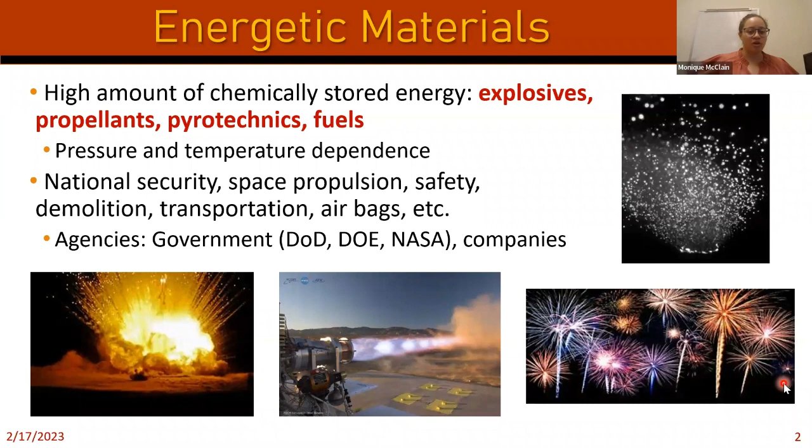Again, they're used in many aspects of our society, anywhere from the government to commercial vehicles to all kinds of things. So even though energetics is a very broad category, I'm going to be focusing mostly on composite solid propellants today, and then towards the end of the presentation give a little teaser about plastic bond explosives. But in general, energetic materials tend to have common features.

I'll be focusing mostly on composite solid propellants here. So to break down what's going on, composite propellants are essentially mixtures of polymer with a high particle content. You can think typically it tends to be above 70 volume percent or above 85 weight percent, depending on the types of particles used, but very high content in general.

Typically the particles will be an oxidizer. Some of them will look like large particles like this, so you'll have some coarse particles and some fine particles in between to help improve our packing ratio. The oxidizer tends to be ammonium perchlorate in the propellant, so that makes the majority of the particles, and they tend to look like crystals - essentially they look a lot like sugar. Then we can include some other particulate additives. For example, we could include aluminum particles to help it burn faster, or we could include iron oxide as a catalyst, and there are plenty of other additives you could include in your mixture.

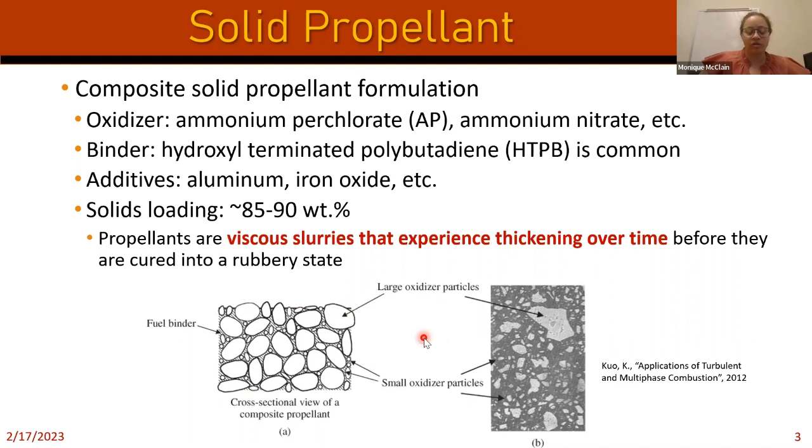When we work with these types of materials, in general, the particle content, so your solids loading or volume loading, will increase the viscosity. Your coarse to fine ratio of particles can also change that, and if you include things like nano additives, that will make it more viscous as well. So these propellant slurries are very viscous, and they also harden over time because of the isocyanate. Processing this material can be a challenge, especially if you want to make certain types of shapes.

Now we're going to back out into the bigger picture. First I was talking about the ingredients of this propellant, but now I'm going to talk about, overall, what we care about in a solid rocket motor. In general, our propellant we want to form into a particular type of shape, because that is the main fuel of our solid rocket motor.

That shape of the propellant grain is essentially going to be burned over time, and the way it burns will affect the thrust generated from that motor. For example, you could design a shape where, as the propellant is consumed, your thrust versus time could be accelerating, or it could be decelerating. But the way it burns over time is going to be very critical to whichever mission the motor has to accomplish, whether it has to glide very far or go very fast.

In general, the way we design that fuel is really important, because how it burns is pressure dependent - the pressure of the chamber will matter. It will also depend on the initial geometry that we design.

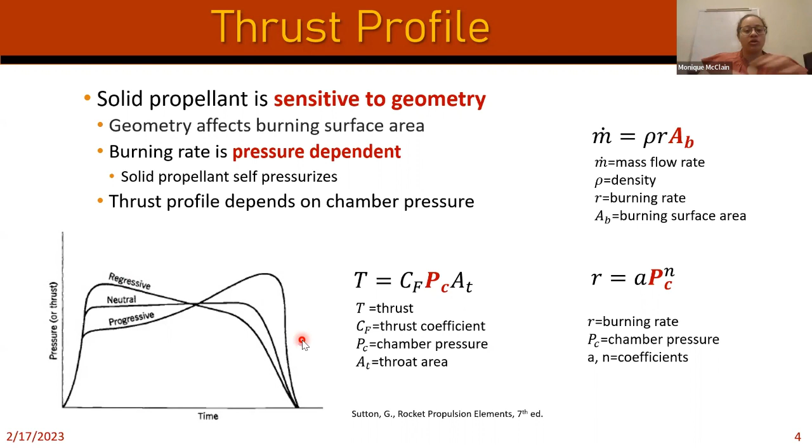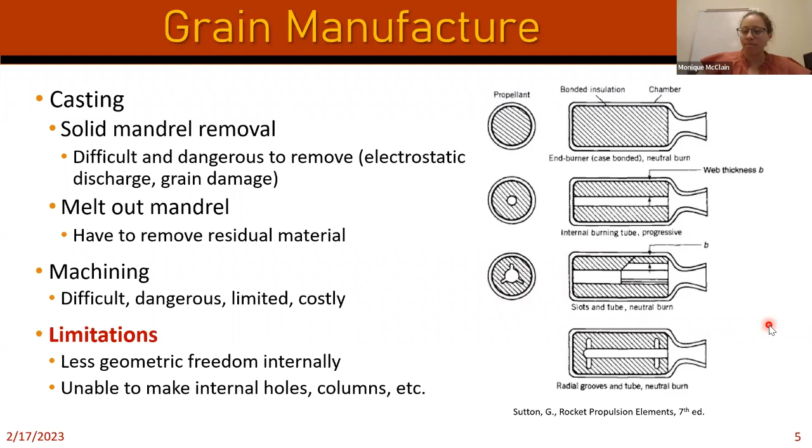That naturally led us to think we could use additive manufacturing to do this, because at the time we started this research, additive manufacturing started to become more commonly used in many different industries. Additive manufacturing means you build something layer by layer rather than starting with stock material and removing it or casting that material. It's been used in many industries to make more geometrically intricate parts.

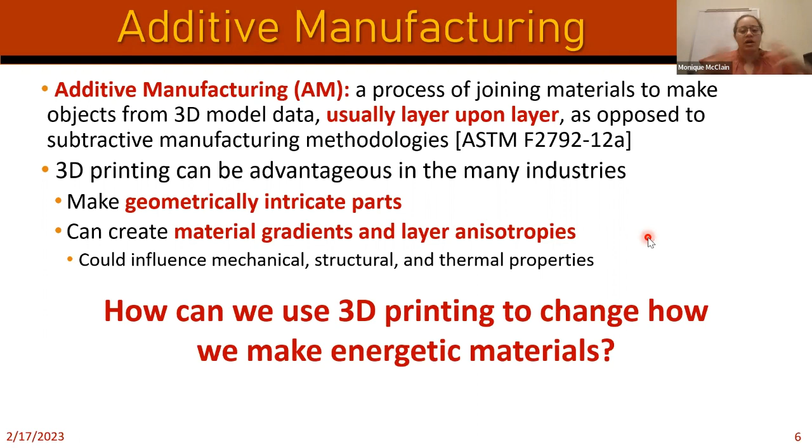It can also be used to make material gradients, which could be of high interest to us as well. So in general, we're thinking how can we use 3D printing to change how we make energetic materials so that we have more flexibility in how we design a solid rocket motor, for example.

First, I'm going to talk about the 3D printing method we developed here at Purdue. We developed a method called vibration-assisted printing. The reason we had to develop this method is that commercially available 3D printing techniques, like direct ink write or fused filament fabrication or other types of methods, had a lot of limitations, and they weren't really made for energetics.

A key limitation is you have to have a minimum volume loading or solid loading content of your particles. For example, if you only had 50 weight% of your propellant particles, like ammonium perchlorate, in a binder, it's not really going to burn, or it's going to burn very poorly. Typically we want something above the 80 weight% range, so we get something to burn more decently and have self-propagating combustion. That requirement limits some of the methods we can use to start off with, because you can't have high particle content in certain processes like fused filament fabrication, for example. That would be rather challenging to do.

Another issue is, can we process this viscous mixture? The more particles you add, or the finer the particles, the harder it's going to be to essentially extrude that material out. So commercial direct ink write was not really amenable to what we were trying to do, especially at the resolutions we were looking for.

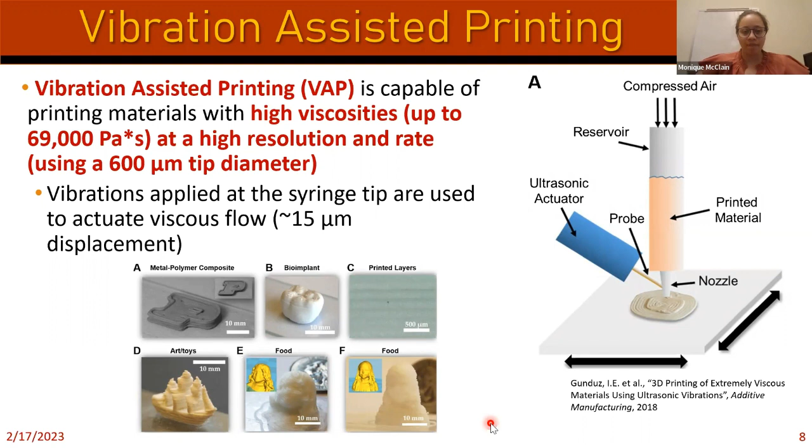Before I play this video, we're going to mostly focus on this right side here. There's more details in the paper and the supplemental video. But in general, when we're applying vibrations, we're applying them at the tip here or near the tip, and we wanted to understand how the flow will change.

When I play this video, first you're going to see that when there are no vibrations applied, this clay is going to barely move, hard to see visibly to the eye. But as soon as we apply vibrations, you're going to see that it moves much faster. I'm going to start playing it now. You can see it's barely coming out without vibrations, but it's way faster with the vibrations.

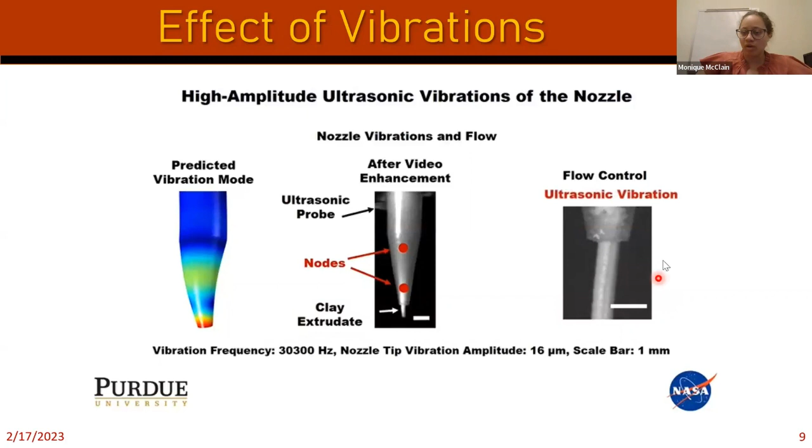The reason for that is now we're looking at the nozzle walls and the material flowing out. We're shaking the nozzle in a way that this material is sliding out without experiencing the same amount of friction that it normally would without the vibrations. As you can see, it allowed us to print these viscous mixtures at orders of magnitude faster at this very small nozzle diameter, which I think these were 600 micron nozzles, and the actual diameter was about 400 micron.

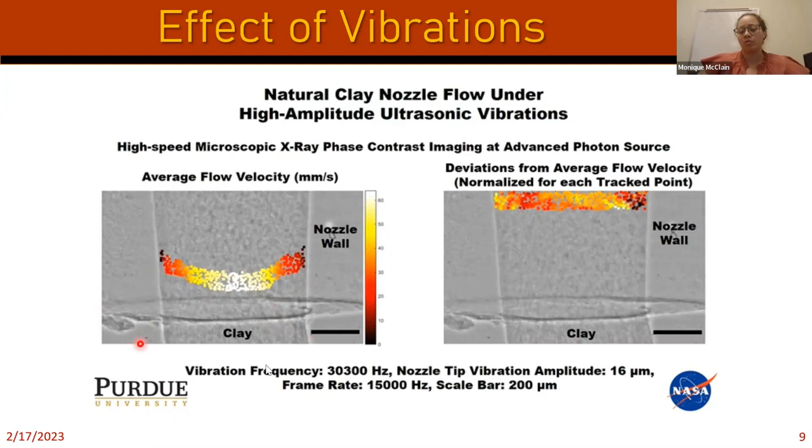So that was kind of the basis of this 3D printing technique. We had this new promising technique, so we said, okay, let's go print some solid propellants. And we went ahead and started doing that.

So we printed two different types of mixtures. Really the important thing about the study was that we showed that we could print a traditional type of propellant mixture without including solvents that have to be evaporated out later, or other additives to make it more shear thinning than normal. That was also an advantage of this paper.

We started with 85% solids loading of ammonium perchlorate, so there are no other fancy additives here. We do have quite a lot of fine particles included, and part of that is because our material, when mixed with HTPB, our traditional binder, wasn't really stiff enough to retain its shape on its own if we had much less fine particles. So even though this is not ideal from a packing perspective of large to small particles, it did help stiffen this mixture because otherwise it would kind of slump.

And then we also reduced the size of the coarse particles, usually around 200 microns, for example. But in general, we were able to make some printable mixtures with the HTPB as the binder. So we have our mixture here and we measure the viscosity of that—relatively viscous—and we measure that over time.

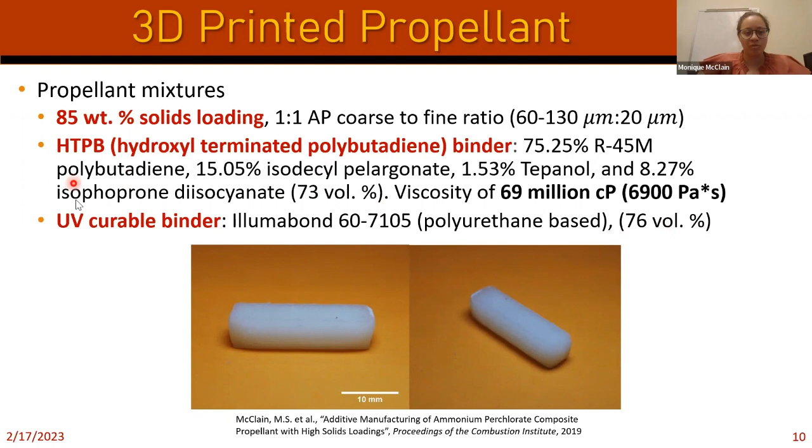So we wanted to start exploring the concept of, can we use something that cures much faster? Because if you're trying to 3D print a complex structure, it's not to your benefit to have it deform while you 3D print it. But in both cases, we achieved relatively high volume loadings, and since then we've been able to tweak other mixtures that can be higher than this. So yes, we could 3D print the propellant, which had reasonable surface finish, but that doesn't tell you anything about the quality of it.

When we're 3D printing or manufacturing propellants in general, we don't want unwarranted voids or delamination occurring, because that propellant is just going to burn much faster than it should. So we, of course, wanted to see what porosity our 3D printing process induced.

So what we did was we took some micro CT scans of several different propellants. Just to orient you here, these top two propellants had HTPB as the binder, and these bottom two had that UV curable epoxy as the binder. These left two are cross sections of the 3D printed strands, and these right two are cross sections of the cast strands. To note, if we're burning a propellant, the flame would be on this plane essentially.

So what we did was first we were looking at these HTPB based propellants, and we saw that there is porosity, so that's not ideal, but porosity is something that can happen in a normal manufacturing process. But what we did notice is that when we use the epoxy, especially for the 3D printed strand, we essentially had a pretty close to full density part. So that kind of told us that this porosity induced in this HTPB was likely not from the printing process. It was likely due from our HTPB mixture.

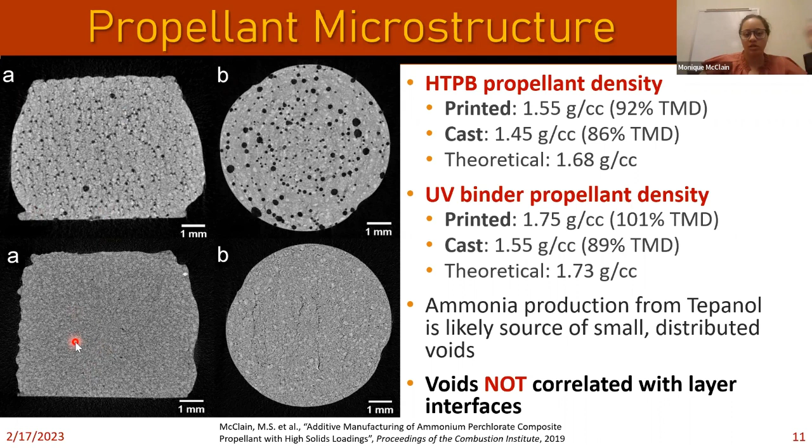So once we tested this microstructure, we did burn these propellants and we found that 3D printing did not negatively affect how they burned overall. So that was very promising for us.

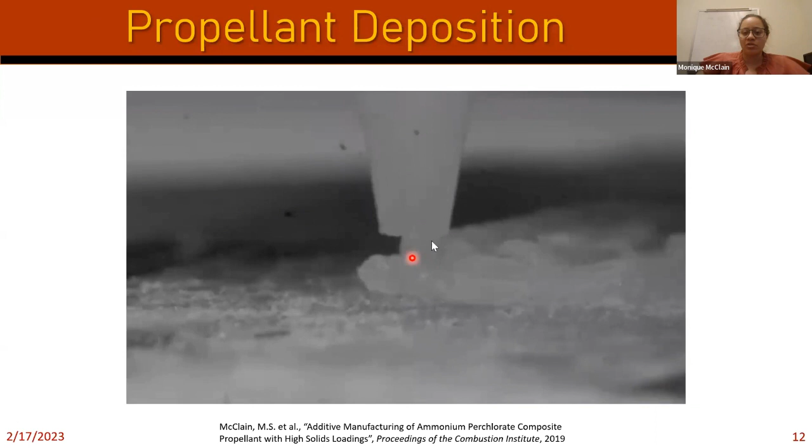Here I just have a quick video of what that printing process looks like. I'll orient you before I play it: this here is the nozzle, and it's depositing a rectangular path, depositing the propellant. You'll see that as vibrations are applied, material comes out, and when the vibrations stop, nothing comes out at that point, so it just kind of hangs out. We can essentially do that again and again to make these types of propellants.

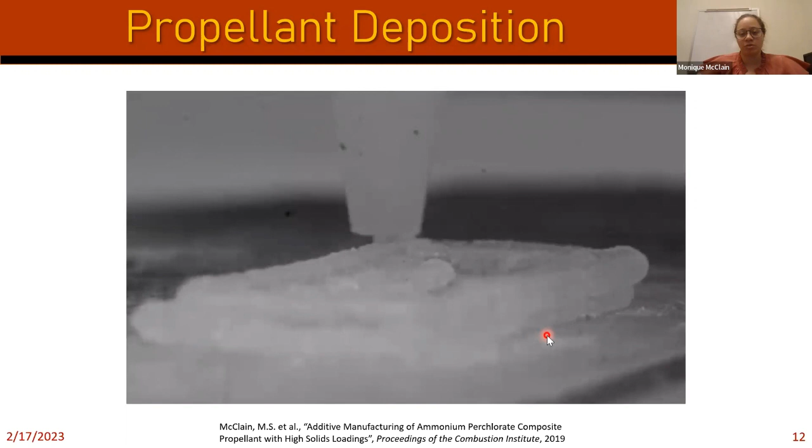But even though we demonstrated we could print propellants, the question is, what comes next?

All right, so now we're going to dive deeper into photopolymers for propellants. As I mentioned in the previous study, clearly HTPB, even though it's our traditional rocket binder, is not going to be a sustainable option for 3D printing, because everything's going to deform, even if you try to make your mixture stiffer.

Photopolymers tend to cure much faster, and they're used commonly in other 3D printing processes, so it made more sense to look into that deeper. We decided to try new photopolymer mixtures, because the one we used before had some issues with the vibrations—sometimes it would clog the nozzle. So in general, we thought there's plenty of other mixtures to try out there, let's go ahead and do that.

In general, when we're talking about our requirements for photopolymers and energetic materials, we need something where we can have a reasonable cure depth. It would not be ideal if the cure depth of your propellant was less than your print layer, because then you would have regions of uncured propellant as you are printing, essentially. So it at least needs to hit that.

In general, our mixture has to be able to handle opaque additives, because in propellants, even though the majority of the particles are ammonium perchlorate, which are clear crystals essentially, you will have opaque additives like iron oxide or aluminum, and the content of that could be around 15%, for example. So that does need to be accounted for here—it has to cure reasonably deep within if there's some opaque additives.

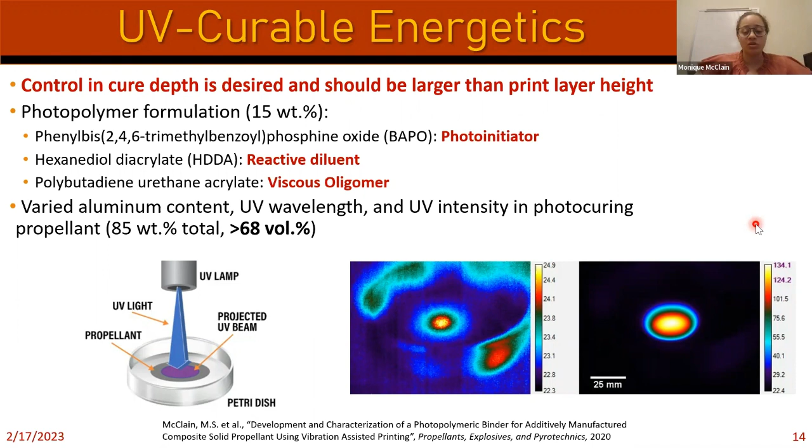For example, this photopolymer reached a really high temperature, but we calculated the change in temperature, so this is more like a 110 degree change in Celsius. That's how we essentially measured some of these features, like how much time it took to get to that max temperature, what that peak temperature was, and so on. Here I have some examples of that.

So this is just the photopolymer itself. Just to orient everyone, here was our test matrix. We had two different wavelengths, or gooseneck lights, that we could choose, and we measured the power of each of these lights. Then before we tested, we measured the area of the light, so with that we could calculate the intensity value. You can see we have two pretty low intensities and then two higher intensities.

I'll highlight that. We also measured the diameter growth rate, looking at what the final diameter was and how much time we applied the light for, based on the IR image data. Then finally, here's some other data points: how long did it take to reach that maximum temperature difference? For the higher intensity ones it was relatively short, and for lower intensity it took much longer. We then calculated that maximum temperature change.

You could see that for the raw photopolymer, it could get pretty hot. However, when we did this for the actual propellant mixtures, it was much lower temperature, so it wasn't actually a concern for us for energetics. It was not hot enough to make it ignite, so that was a good thing.

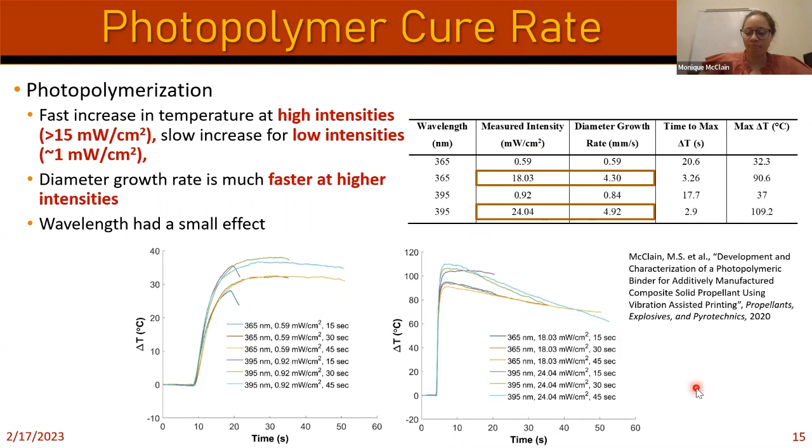And then finally, we moved on to testing the actual propellant mixture. So now we actually looked at, okay, what happens when you have 85% of these particles? You could either have some content of aluminum up to 20% or just all ammonium perchlorate. And then here, this is where we measured the cure depth of that propellant.

So what we did was kind of the same type of study, but we were focused more on the depth that it cured at. What we found was in general at these lower intensity conditions, even though it's not going to maybe cure that well in terms of mechanical properties, it did cure deep enough for our printing process. Typically our layer heights are about 0.25 millimeters or 0.3 millimeters, but this is much larger than that. So even with low intensity light, we can cure relatively well.

Of course, if you have higher intensity light, we can cure much deeper. So we can cure anywhere from about 1.6 millimeters to 3 millimeters. But in all cases, if we have aluminum in that, it's still going to cure deep enough in our particular printing application. So that was really promising for us.

But in general, there's a lot more work to be done in understanding what's going to happen with these cure depths, because if you cure layer by layer, now you're going to have these interfaces between your print layers, and it's not necessarily going to be as strong as if you just had something completely cured altogether, like with traditional isocyanates and HTPB. So there are definitely challenges with trying to figure out how do we improve these mechanical properties.

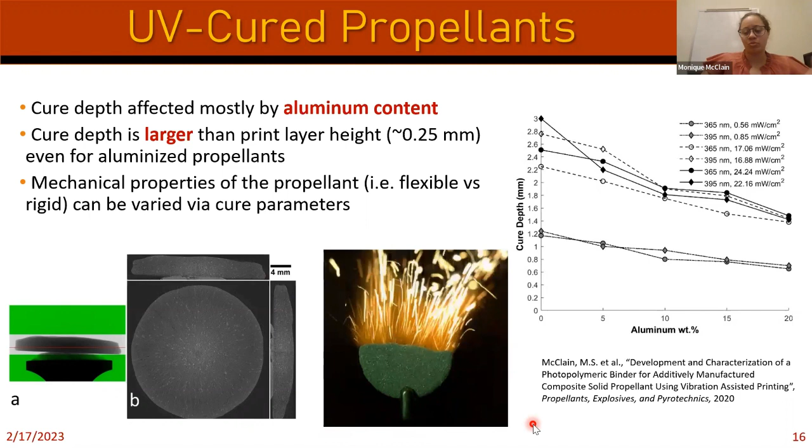So this here's kind of a teaser for what we're working on next. We've essentially started tweaking the ratio of these ingredients because again, that oligomer is very, very viscous, and we probably had too much content of that HDDA mixed with that oligomer. So we've tried to improve that ratio.

We're trying to do some tensile testing of some inert propellants. So here's an example of one of those. And this is, you know, it's not necessarily a successful sample, but the point is to demonstrate that we have a dog bone type 1 specimen. It's 5 millimeters thick, so we cure from both sides.

So we have 2 cure layers, but the point being that obviously that cure layer is going to be pretty weak. This is an example of how it got stuck and my students are trying to take it out, and then of course it started breaking at that interface where it was curing. So it's going to be really important to understand are there ways to improve that adhesion between those 2 cured layers, or do we have to explore something like dual cure mechanisms where we partially UV cure and then complete the cure thermally later. So these are things that my students are working on now.

So they're looking at testing cast samples. They're looking at testing 3D printed samples as well.

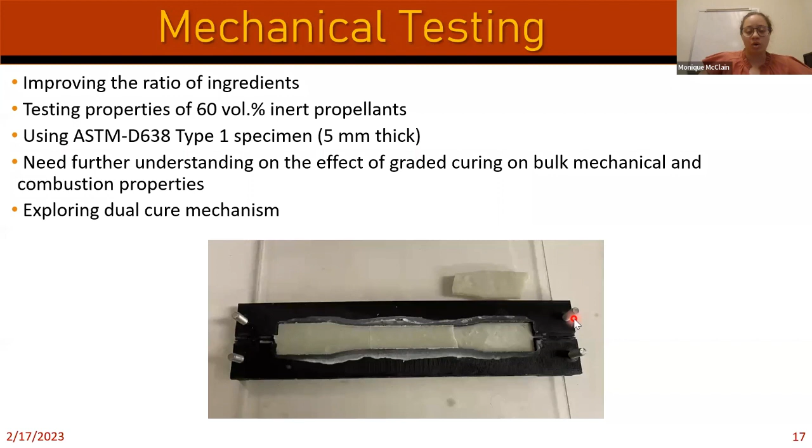Okay, so next I'm going to get into multi-material 3D printing, essentially, of our propellants. So like I mentioned, we're interested in making new geometric patterns for our propellants because that controls how they burn. But why can't we control how they burn by changing the material content within the propellant grain itself?

So the idea was, can we print multiple types of propellants into one strand and see how that burns dynamically? We would 3D print three types of propellant mixtures. The outer layers are just normal ammonium perchlorate propellants, and the inner layer either has a bit of nano aluminum or a bit of iron oxide. So it should burn faster than the outer layers.

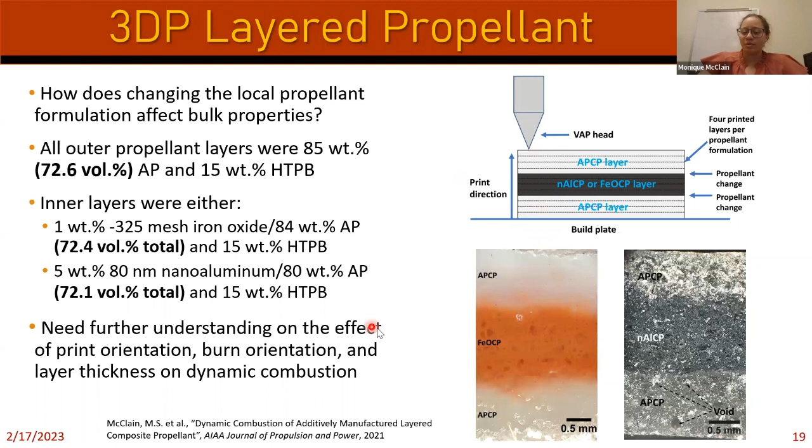We have some images of what those look like. The white is essentially the ammonium perchlorate propellant, so no additives there. The middle layer has a bit of iron oxide in it, which is why it's red. These printed layers are about 1 millimeter thick. We can see there's a little bit of intermixing between the layers, but considering this is relatively thin, only about 3 millimeters thick, this intermixing is not terribly bad for our first attempt. I think it could improve if it was a more viscous mixture, there would probably be less mixing at this interface.

And then here I have an example of the other type of propellant mixture. Again, we still have ammonium perchlorate on the edges, but then in the middle we have that nano aluminum mixture. Here, for example, that interface is much more defined, and that's probably because the nano-aluminum is stiffer. So that interface will probably be a little better, there won't be as much intermixing.

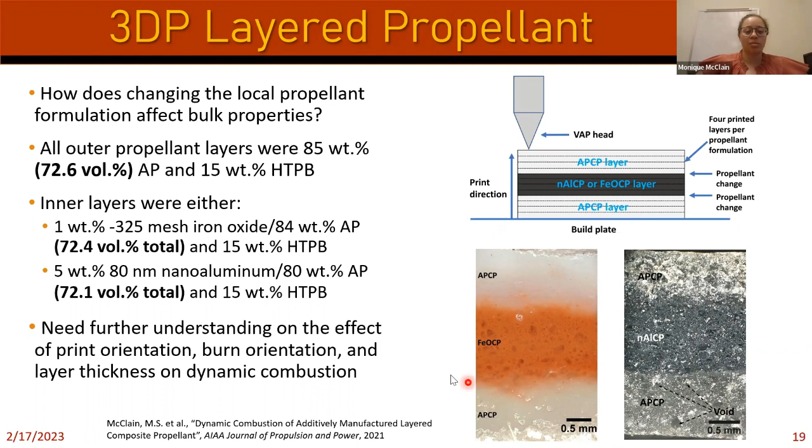But in general, we're printing relatively small scale multi-material parts here. So we're trying to understand how changing the propellant composition at small scales will affect how it burns, or maybe even mechanical properties. So I have a video for you showing how it burns.

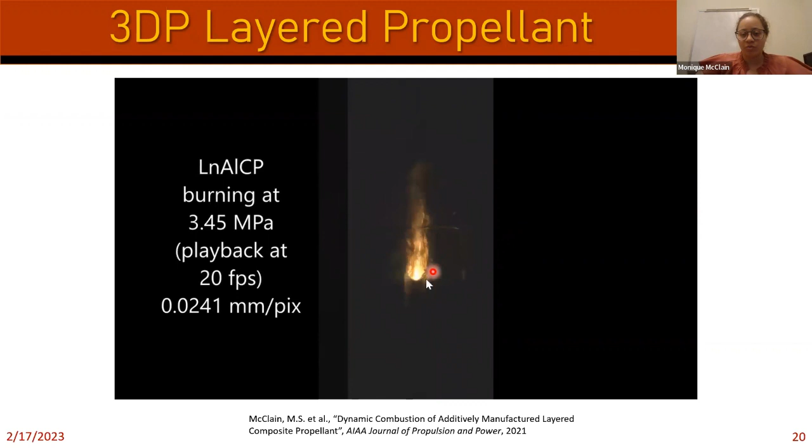I'm going to show a layered nano-aluminum propellant. Typically, if it was not layered, let's say it's just ammonium perchlorate, what should happen when you burn it at high pressure is that it should ignite and then burn flat or linearly. But here you're going to see something different. So here we ignite it, and then over time, you'll see some sort of burning surface area developing. We develop this V shape that eventually becomes pretty stable at some point, right? It doesn't really increase anymore.

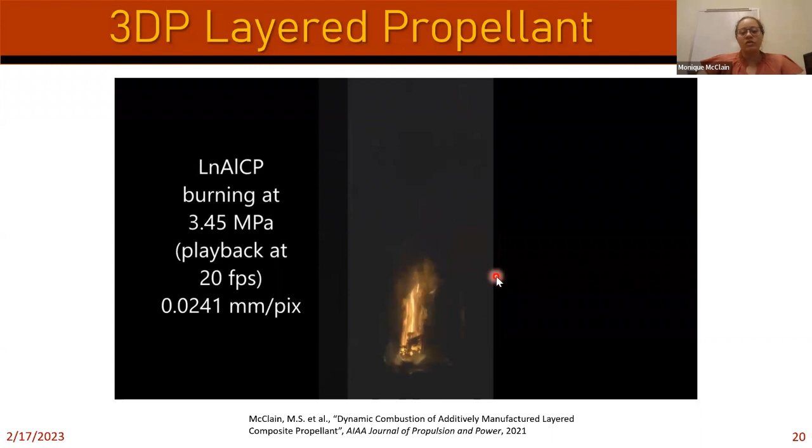So we really want to understand, how long does it take from ignition to go to this V shape? What is the length of that V shape when it gets stabilized, and quantify other characteristics. Here are just some stills showing the exact same phenomenon for those propellants. But we really wanted to understand, how does the surface evolve over time? How does this middle burning layer of propellant compare to the burning rate of the same thing, but not layered? For example, this iron oxide layer, does that burn as fast as just a normal iron oxide propellant, a single material propellant? And same for the nano aluminum.

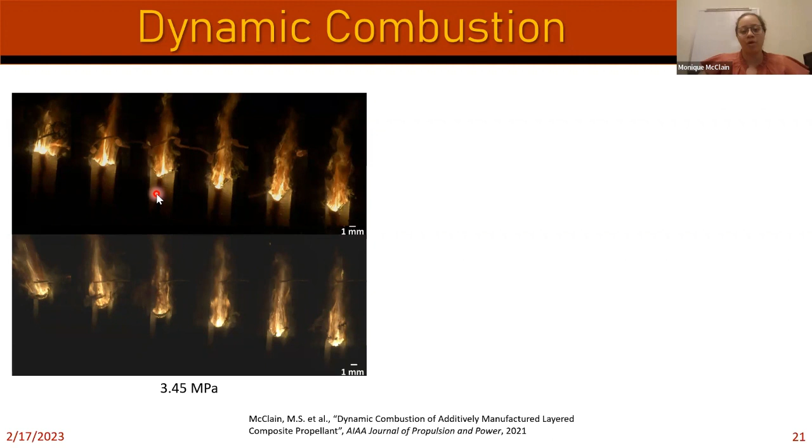So we did some burning rate experiments to explore that. Typically for burning rate experiments, we put that on a log-log scale, and we do a curve fit to figure out essentially the slope and then the intercept. Usually we care mostly about the slope. In propellant land, we want to see, is that slope reasonably stable or not? Usually we don't want it to be something like 1, but in general, the slope can give us information about whether these two materials are burning the same or similarly. So to orient everyone, I have data on both curves. On the left, we have data related to the iron oxide, so if it's L iron oxide composite propellant, that's the middle layer of this.

If it's no L, that essentially means we're comparing the burning rate, the linear burning rate, of just normal iron oxide propellant. And then we have APCP, which is just the linear burning rate of normal ammonium perchlorate propellant, the slower burning one.

On this plot, it's labeled similarly, but the additive is nano aluminum instead. So in general, we were comparing these. This curve is just the normal slow burning propellant, and then we compare those two, looking at the iron oxide layer versus the normal single iron oxide material. We found those burning rate slopes were pretty much the same.

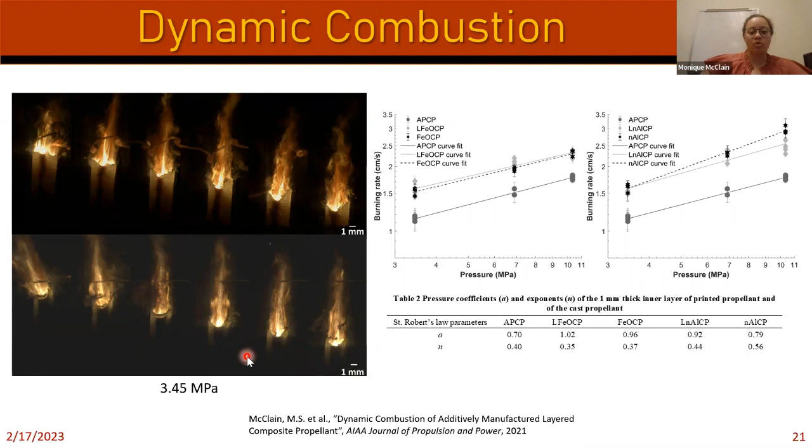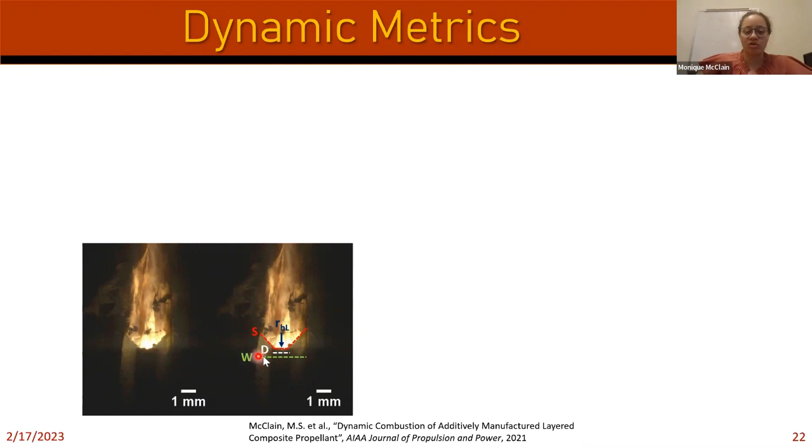And then kind of quickly, we did try to define some new metrics. Based on this high-speed image data, we defined something called surface length, trying to understand how the surface evolves over time. We also measured the thickness of that middle layer, which is D, and W would be the thickness of the entire strand. Based off that, we also tried to figure out how this evolves over time.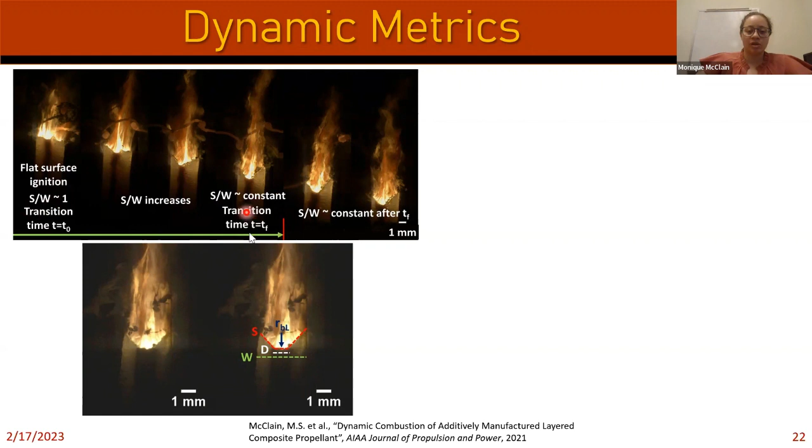When something ignites, the surface length and width are relatively flat, close to 1. But over time, surface length increases, then at some point it stabilizes — it doesn't really look like it's increasing anymore. So we tried to quantify something called transition time: transition from a flat surface, S over W equals 1, to where it increases but then stabilizes again. We quantified that value and found that for the nano aluminum, that transition time was relatively faster compared to the iron oxide.

But in general, there are a lot more things to define in terms of this combustion. We're very used to just saying, okay, what's the linear burning rate, and looking at data that way. We're not really used to looking at what happens when you have a multi-material system, so we're definitely looking into understanding those dynamics more.

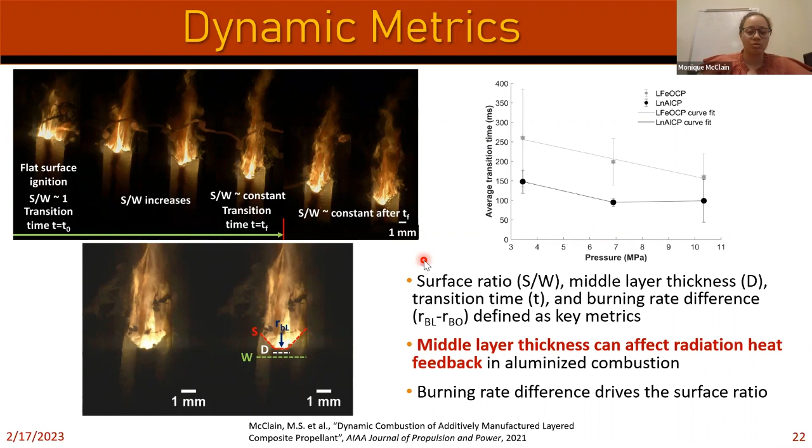Okay, so the next thing we're working on is dissimilar material printing. This is mostly focused on printing thermoplastic materials together with either something like a propellant or some sort of polymer-bound high particle mixture. The goal of this work is to co-print these types of materials together. There are a few reasons in my field why we want to do that, but there could be other applications outside of this, so we're trying to make our approach widely applicable.

In our field, one application is for that propellant grain I was talking about a while ago — typically it is supported by a liner around that propellant. It's usually not very thick, relatively thin, and the purpose of that liner is to protect the motor casing from the heat of the propellant.

Typically you want to make sure that when you're bonding this propellant to that liner, there's no delamination between those two layers. Because if you have delamination, your propellant flame can spread through the interface, which could blow apart your propellant chunks and possibly your motor.

So one advantage could be if we co-print the liner with the propellant grain as we go. Not only can we have more control potentially over the adhesion, but we can monitor, okay, is this bonding or not? So that's one application.

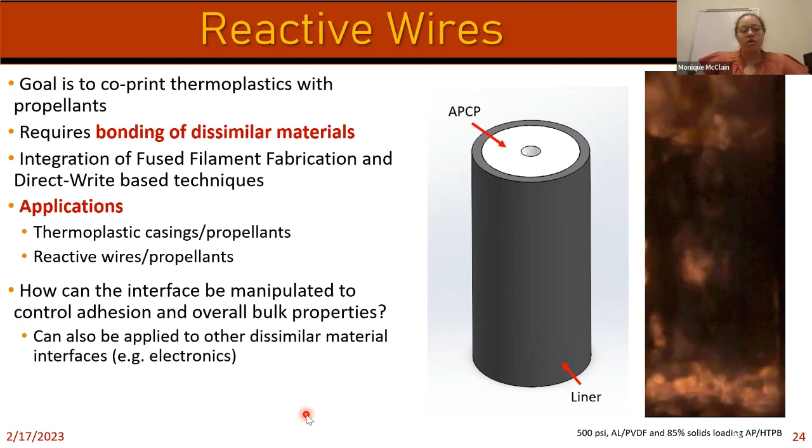Recently I had a student present some preliminary work at the AIAA SciTech conference in January, but essentially he was attempting to understand how we measure the adhesion of these two dissimilar materials. I will say we're not truly measuring adhesion in a classic material science way. We're really just looking at what's the peak force for these two things to separate.

So the approach we decided to use was a modified double cantilever beam test. A double cantilever beam test is essentially when you have two things together and you're peeling them apart, and they have relatively close matching bending stiffness. However, that wasn't necessarily the best approach for what we're trying to do, like the classic version, because we have a rubbery material and a rigid material, but we did find someone who modified that.

Essentially what they did was, to make these two parts bend more equally, you can reinforce that weaker part with some stiff backing. So what we did was some calculations. We have something called a thermoplastic layer - this is the actual part, one of the layers we want to peel apart. Then we have the HTPB on the other side of it - again, something we want to peel apart, and we want to look at that interface between the two. But we reinforce the HTPB with a thermoplastic backing.

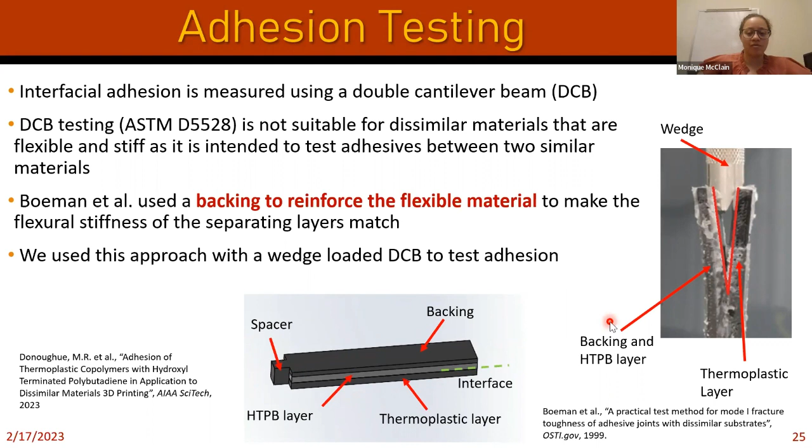Yeah, there is clearly a loading rate dependence, which is not unexpected. But in general, the key thing here is looking at least for the same loading rate and for the different materials, we're starting to see some quantitative differences here, or maybe more qualitative, I guess.

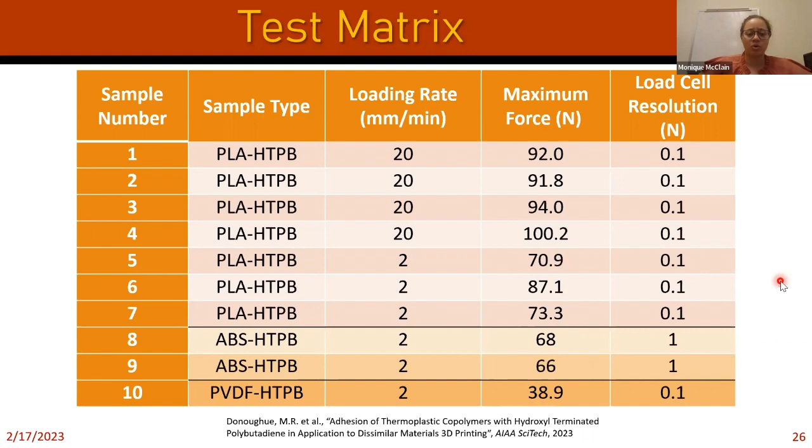But we're looking at that peak force when essentially those two are peeled apart. And that's the peak force of the wedge that's being measured. So we see, okay, we got somewhere in the 70 to 80 range here. This is more in the high 60s range, and this is much lower for the PVDF, which is what we were hoping to see because it's not going to bond as well.

But in general, we can see some differences here. So there are some improvements to be made. We do see some multi-peak things, and we want to redesign this wedge interface a bit better, so it's not directly on this HTPB and whatnot. And we're also considering maybe pulling them apart rather than driving a wedge.

But in general, we can see some differences in that peak. So either here it's tearing or there's some slight differences. But here the PVDF is definitely, from what we've seen in the sample, it's definitely peeling. So that means it's not that strong of an interface compared to these other materials.

But in general, we do want to improve this process because we want to have a way to compare these materials together. And ideally, we would like to measure differences between, you know, like this 3D printed surface and HTPB and whatnot.

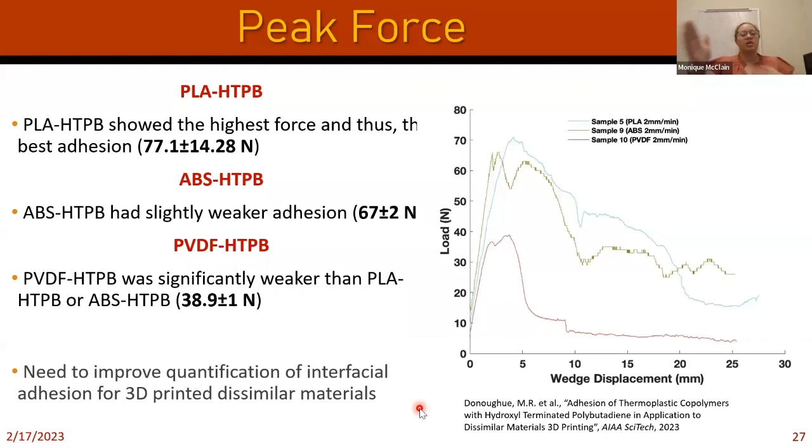And then finally, I'm almost done. I just want to give a quick teaser of the AFOSR project. We're now also looking at how do we control the microstructure of plastic bonded explosives. So this is work that we are going to be doing, but I'm just going to kind of frame what we're trying to accomplish with this work.

So when we're looking at a plastic bonded explosive, that's pretty similar to a solid composite propellant. If you think way back when I had those slides where we had some particles and some smaller particles in a matrix, it's kind of similar to that, but a higher content of particles.

But essentially, there could be defects that form within a plastic bonded explosive. So for example, there could be very tiny pores, or there could be a cracked crystal, or a crystal could debond from the polymer. And all of those defects will change the sensitivity of that explosive.

So for example, there are these things called hotspots that can form if you, for example, detonate your explosive with impact, or if you vibrate your explosive. So hotspots are something that essentially they form in a certain type of defect.

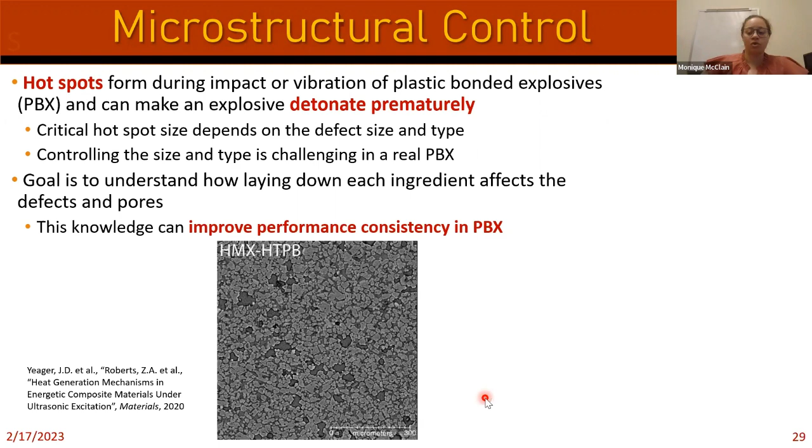So it has to be a certain size or type of defect. Essentially, it's a large increase of temperature that happens in a localized area, and it can make the explosive go off before it should, with less input energy than what it was designed for.

So an example: this would be a current microstructure of a plastic bonded explosive, HMX with HTPB. We can have all these particles here, the lighter gray, and the darker gray would be binder-rich regions. There are some black patches, which could be defects or pores. How these pores are formed, or how the binder-rich regions are distributed, or how these particles are pressed against each other, will affect where hotspots localize.

So what we're looking at now is, can we change the way we arrange this microstructure to make it more consistent, so we can better predict what these explosives are sensitive to. Maybe we could preferentially get rid of certain size pores known to cause hotspots, or maybe we want those pores. Maybe we want to engineer some other type of features. But in general, the goal is to improve the consistency of these plastic bonded explosives.

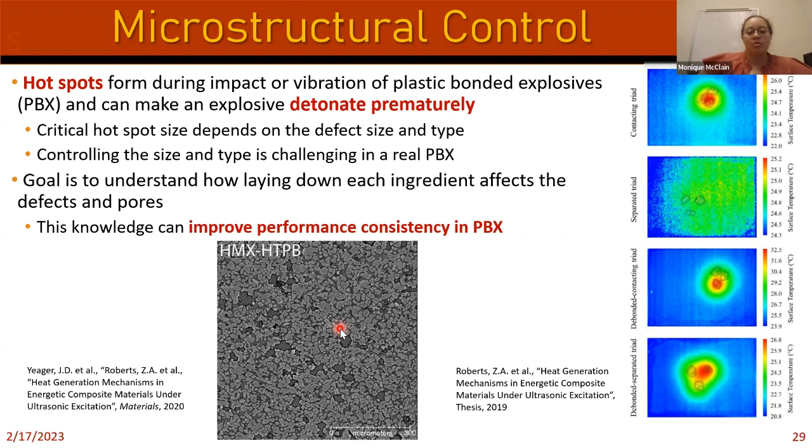So this is work we're looking at, primarily using advanced manufacturing techniques to figure out how to lay all these pieces together to make it perform more consistently, and how to make it safer. Because if it goes off with too little energy, or less energy than you expect, that would really not be a good thing. This is work we're currently starting on.

So with that, I'm going to conclude. We've used vibration assisted printing to make very viscous mixtures printable into different shapes without modifying our propellant. We didn't have to use solvents or other things that were different than a traditional solid propellant mixture.

We're currently looking into how we can find either photopolymers that are compatible with energetics, or maybe some dual cure system compatible with energetics that provides reasonable mechanical properties but allows us to print taller, more complex structures. We've also explored multi-material 3D printing, where we either change the propellant mixture or look at dissimilar material printing to understand the adhesion of these materials.

And now we're starting to look into controlling the microstructure of plastic bonded explosives. In general, our work is to understand how we can advance additive manufacturing science to actually 3D print these energetics and control the structure better.

Excellent talk, Monique. I enjoyed that a lot. And I do have a few questions, but I'm going to start with that.

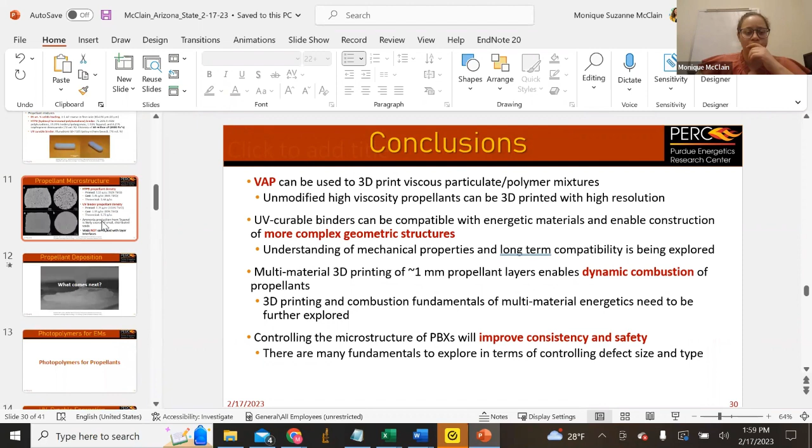I saw you talking about the different binders for the propellants, and you mentioned that with one you'd have more porosity and the other you wouldn't. You were also comparing the 3D printed parts and the cast ones. I didn't note the exact slide, but my question is: you said you were looking into the one with less porosity because that would control the burning rate better, right? But could porosity be beneficial in terms of increasing surface area and thus increasing the burning rate? Or is porosity actually a bad thing for propellants?

Yeah, that's an excellent question. In general, yes, porosity will affect how it burns, and it will generally increase the burning rate. The problem is if you have too much interconnected porosity, because that can propagate down and cause the propellant to split apart, or chunks to delaminate. So some porosity is not necessarily bad, but in general we can understand how it burns better if it's a fully dense material. So with energetics we try to achieve as full density as possible, because those are properties we can predict better. Some porosity will affect how it burns, but it's not necessarily the worst thing as long as it's in a reasonable amount.

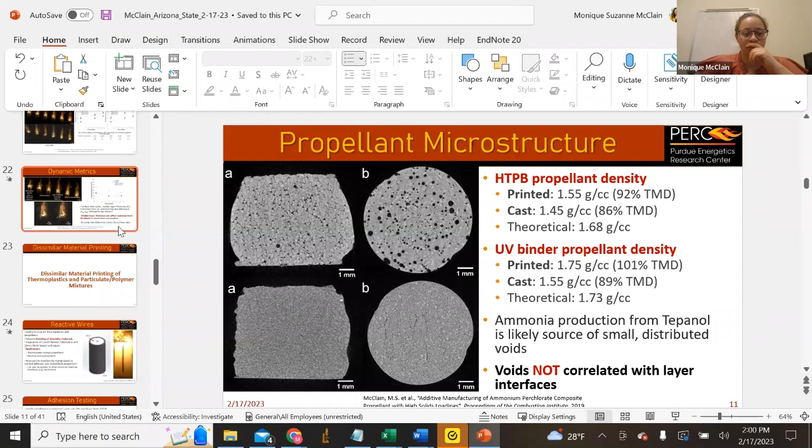I had a question, Monique. Can you take us back to the slide where you had the wire and the composite around the reactive wire? Can you play the video again for us one more time? Oh, yes. Play. What is the wire material here?

There's an excellent paper from my colleague, Dr. Diane Collard, who used X-ray imaging to see, okay, if we have more complex 3D printed shapes cast in a propellant, how will it burn? But at the same time, long term, you're not really going to be casting propellant around these wires. You're probably going to want to co-print them to understand the adhesion better, or to process more complex shapes.

So none of the structures that you've printed so far are structural components to carry payloads. They're geometrical burning surfaces, but there's no structural component at the moment.